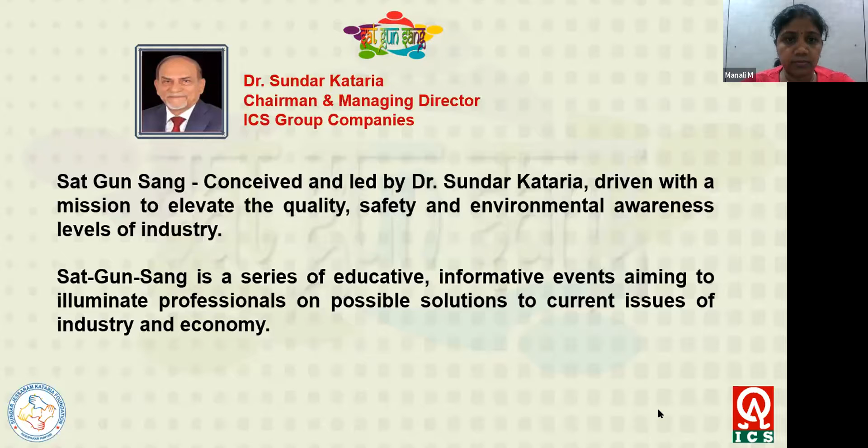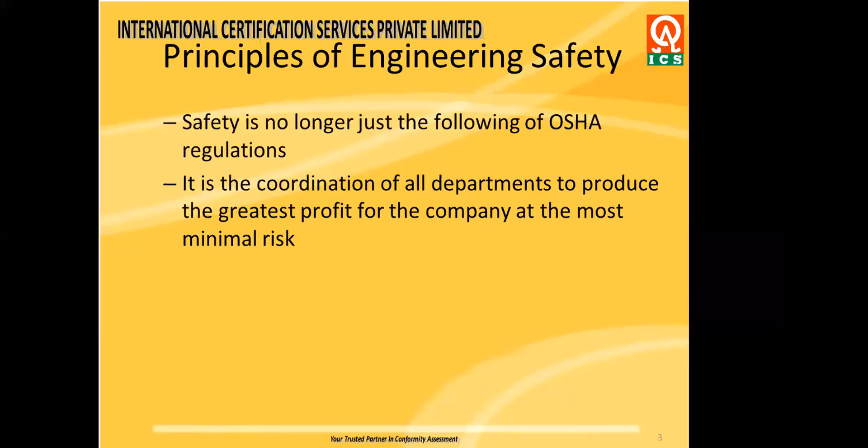Who is Panjit? Panjit is requesting, so I'm declining again. Please do not write.

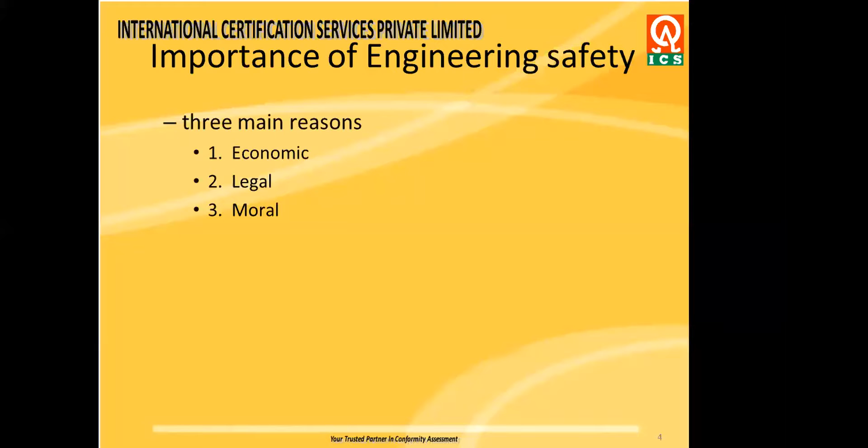There are three major reasons for having engineering safety. The first and foremost is economic—every individual, every company, every country, every organization is working for their economic benefit, and engineering is helping everyone with this. Meeting the legal requirement is again a very important factor for engineering safety. And engineering safety also gives morale and motivation to our people. We shall be covering the major industrial accidents through engineering: machinery, vehicle movements, slips and trips, electricity, manual handling, and uncertainties encountered in design process.

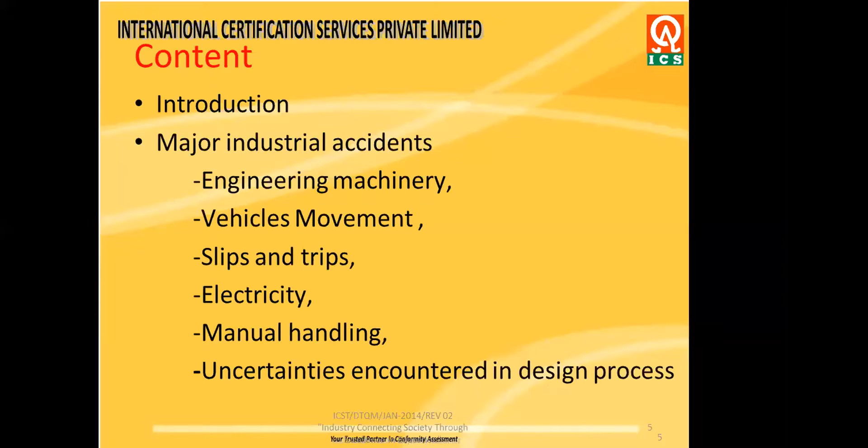So before we start, I'll take two and a half minutes of time to just have a look on how this...

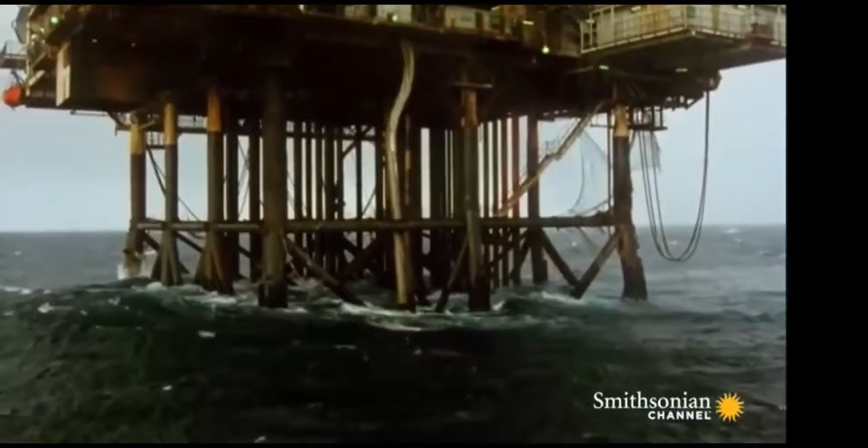Anandji, is there an audio with this? Yeah, you are not able to see, sir? No, we are not able to hear your audio. You will have to reshare it and put the audio, tick mark on the audio.

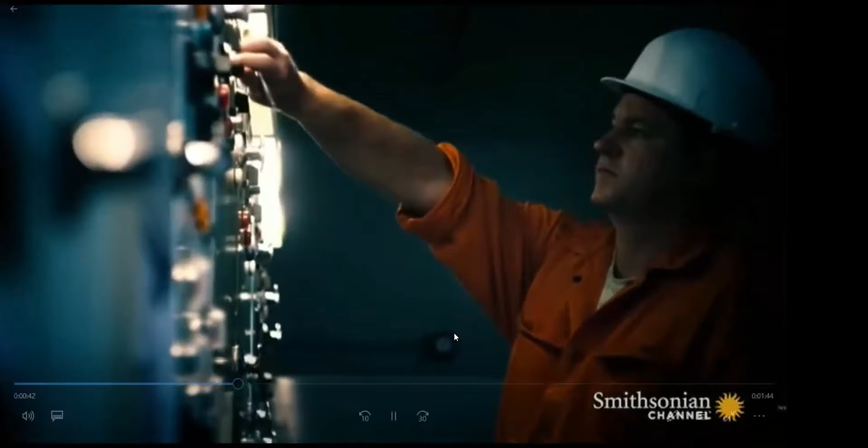So when you do the share screen option, there is a button which says share audio. Just tick mark that. Okay.

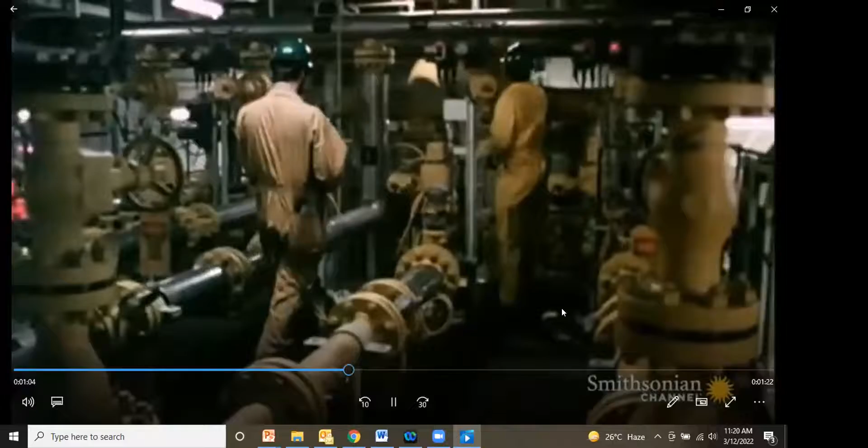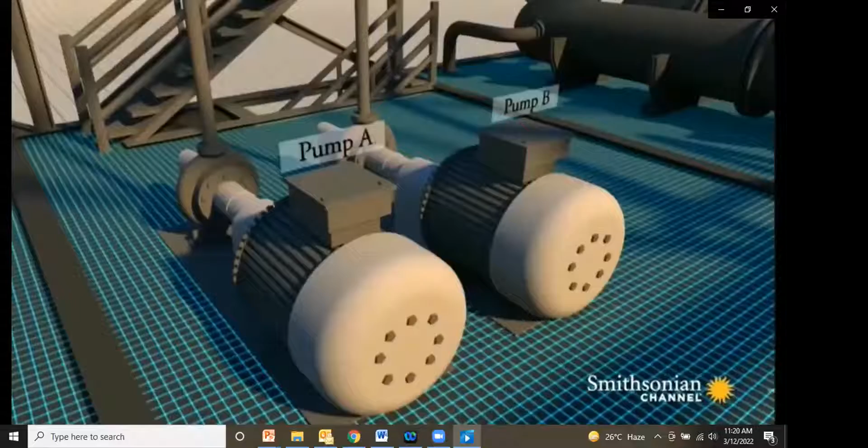Shutting down everything. To avoid a full shutdown, a decision is made to halt maintenance on Pump A and bring it back online. But what nobody knows is that Pump A has a fatal flaw. During maintenance, its safety valve has been removed, meaning that there is nothing to stop thousands of cubic feet of gas escaping into the atmosphere. The faulty pump is switched back on.

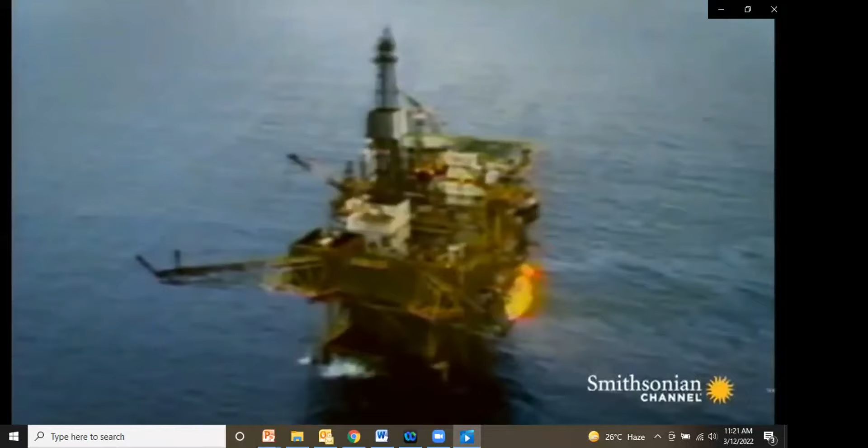Then, at 9:55 p.m., disaster. A spark suddenly ignites the escaping gas, and an explosion rips through the rig. Confronted by 700-degree flames, most of the 226-strong crew are now either dead or severely injured.

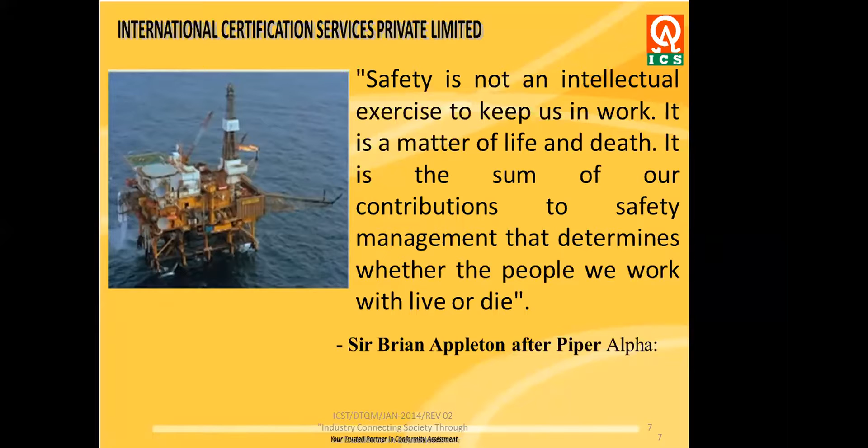So this was an incident which happened at Piper Alpha. Safety is not an intellectual exercise to keep us in work. This was said by Sir Brian Appleton after his investigation. It is a matter of life and death. It is in the sum of our contribution to safety management that determines whether the people we work with live or die.

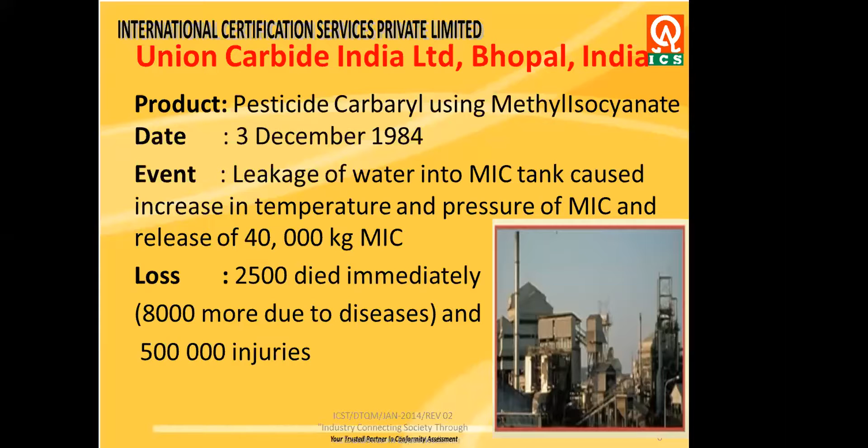You are all aware about the Union Carbide India Limited Bhopal case that happened on 3rd December 1984. The product handled was the pesticide carbaryl using methyl isocyanate. The event that happened on that day was leakage of water into the MIC tank, causing increase in temperature and pressure of MIC and release of 40,000 kg of MIC. It killed 2,500 people immediately, and more than 8,000 people died after some time from that exposure, and more than 5 lakh people have injuries till date. Why did this happen?

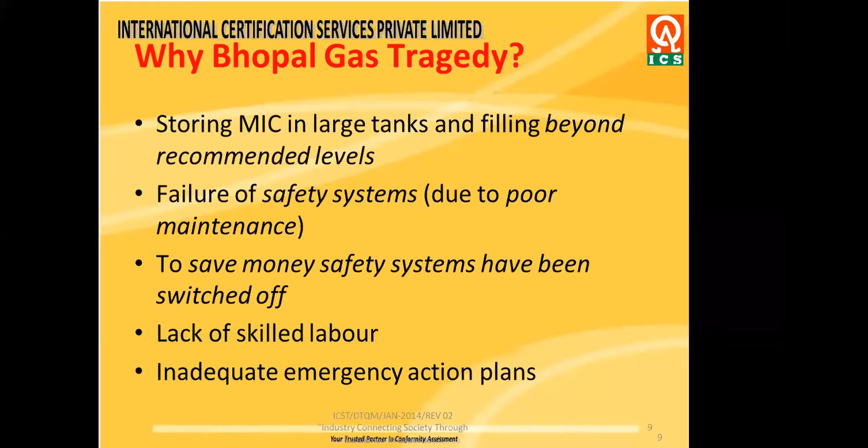It happened because the design was not followed - storing MIC in a large tank and filling beyond recommended levels, not following safety standards given to the organizations, and failure of the safety system due to poor maintenance. Maintenance is again a very important aspect of engineering safety. To save money, safety systems have been switched off. I won't say much on this - this is generally happening. There was also a lack of skilled labor and inadequate emergency action plans.

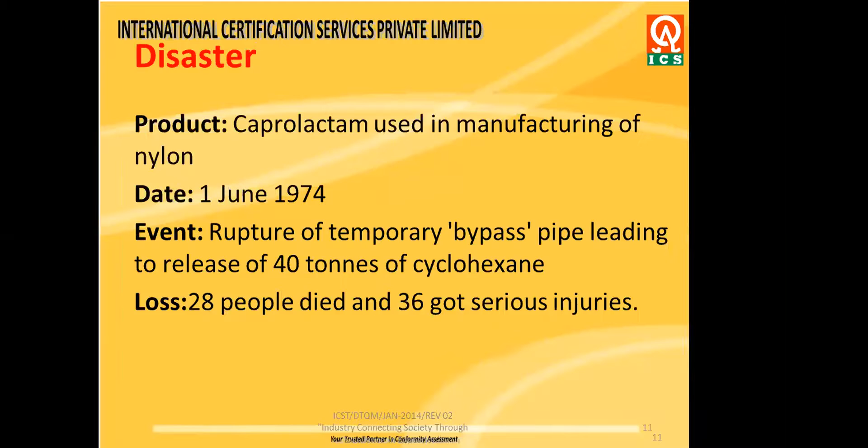There is another incident that happened at a chemical plant in Flixborough, England. The product handled there was caprolactam, used in manufacturing nylon. This happened in June 1974, and the event was the rupture of a temporary bypass pipe, leading to the release of 40 tons of cyclohexane. 28 people died and 36 got seriously injured. The investigation found it was a poor design of the high pressure pipe system by inexperienced engineers. So here the focus is that design is also very important in engineering safety.

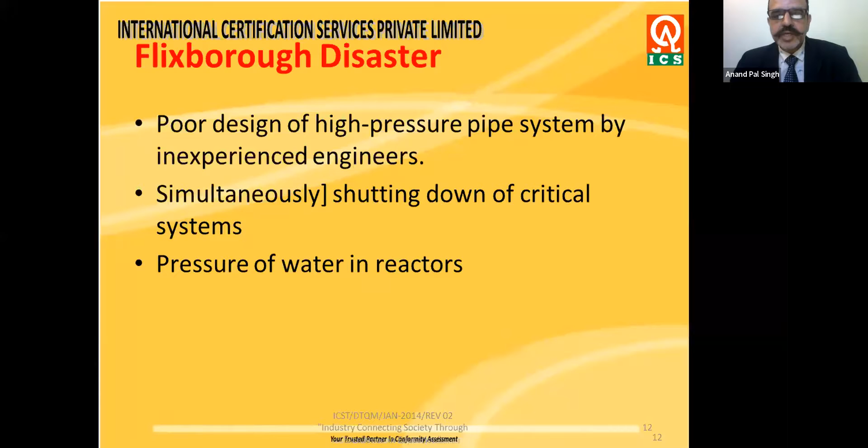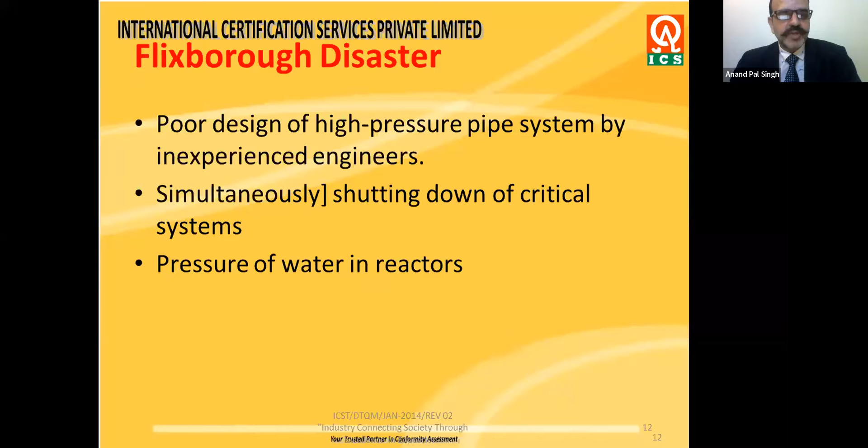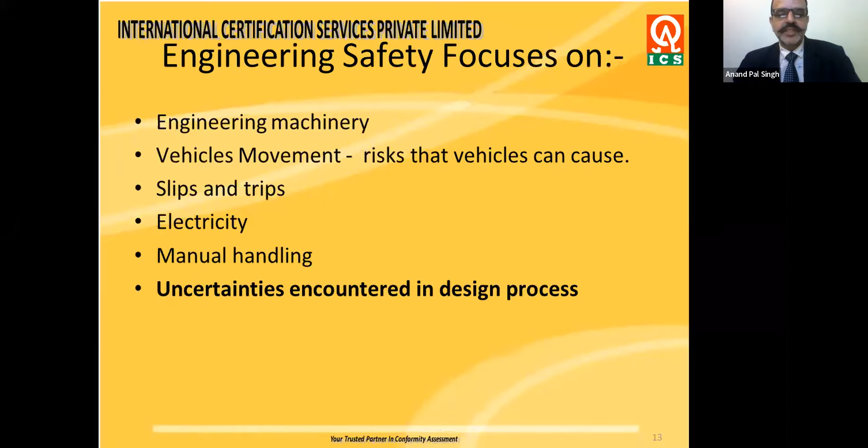Simultaneously, there was shutting down of critical systems, not following instructions, not following guidelines, and incorrect pressure of water in reactors - the norms of pressure, the norms of the machine were not followed. Engineering safety focuses specifically on engineering machinery, vehicle movements inside the plant, slips and trips, electricity, manual handling, uncertainties encountered in the design process, and regulatory and statutory requirements.

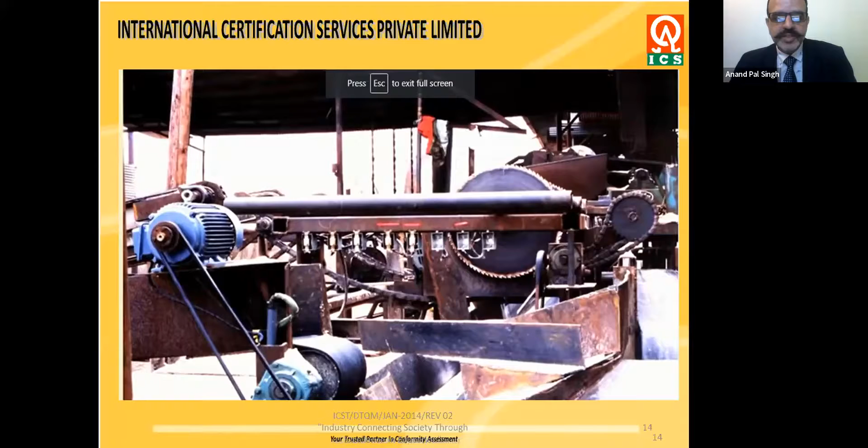You can see this in the steel industry - it's a very common scene in steel plants where the atmosphere is hot and humid. Hazards are sourced by design or technology because there are certain things we cannot relieve. We must have some mitigation plan for such situations.

You must have seen this in construction sites also. In construction, industries have been practicing this type of work - working at height, using safety harnesses and various other aspects - but even then accidents still happen.

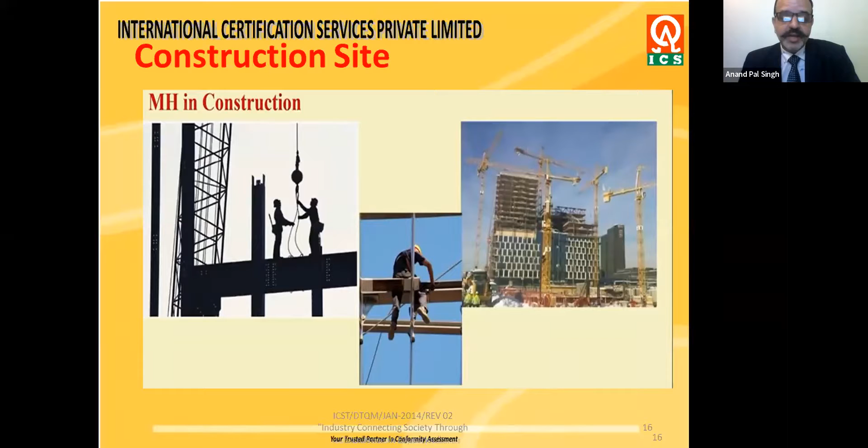There are many thousands of accidents and cases of ill health every year in engineering workshops. More than half of all such accidents reported to HSE involve lifting and moving goods, or slips, trips and falls. Between 10 to 15% of accidents involve the use of machinery, and HSE has produced guidance on how to prevent or manage many of these risks.

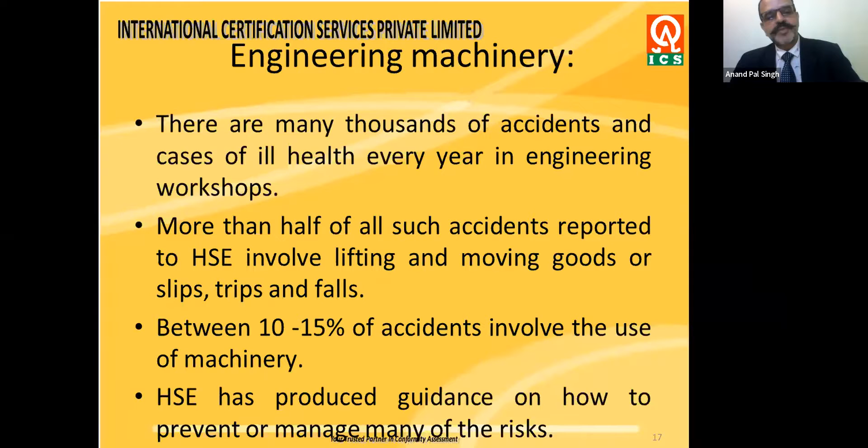Not only the HSE, the Factory Act also gives every detail. I'll be sharing these details in my presentation and coming slides. The objective of this presentation and meeting is to improve safety and awareness in the industry, and to see how we can avoid accidents, prevent them, reduce them, and achieve 100% accident-free working.

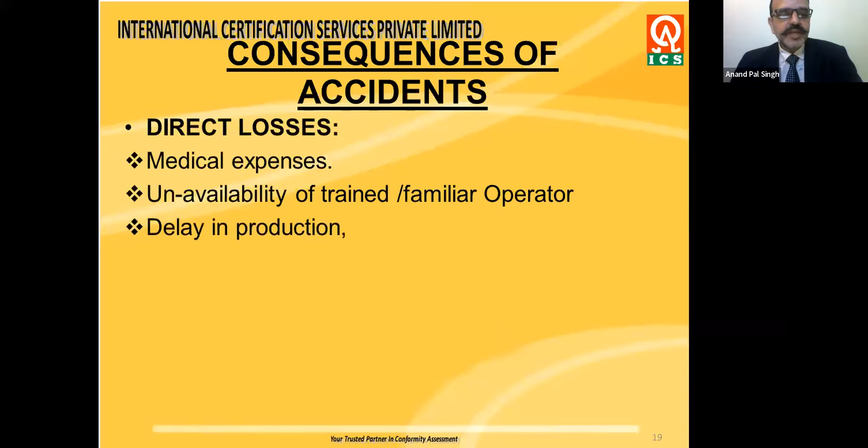This saves productivity, and there are consequences of accidents - direct losses like medical expenses, unavailability of trained and familiar operators, delay in production, loss of order, loss of revenue, and physical disability and death.

There are indirect losses also. There is no peace of mind in the family. When a person is working in an organization where safety is not there at all, the family always thinks whether he will be coming back or not. There is frustration in life, future plans get upset, and there's loss to the family if death or disablement occurs.

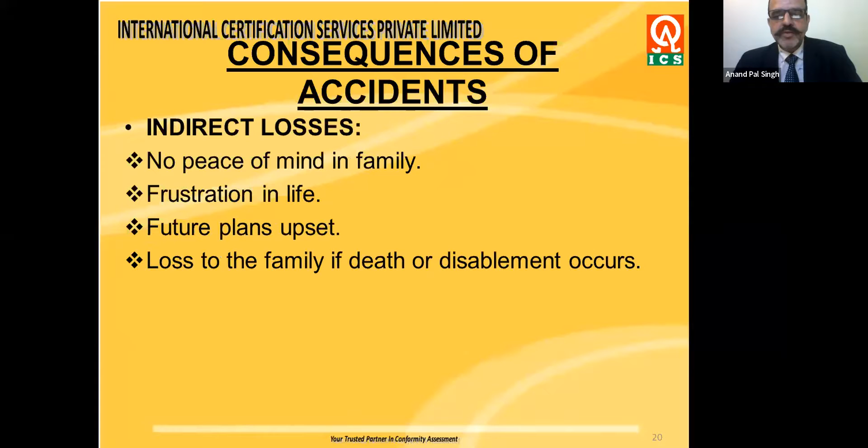Accidents happen due to unsafe acts, not following safety norms applicable to them. You have seen in the video clip and pictorials I showed you that certain safety norms are established which are not followed. The standing orders of the company, of the government of India, of the state government are very well established but not followed.

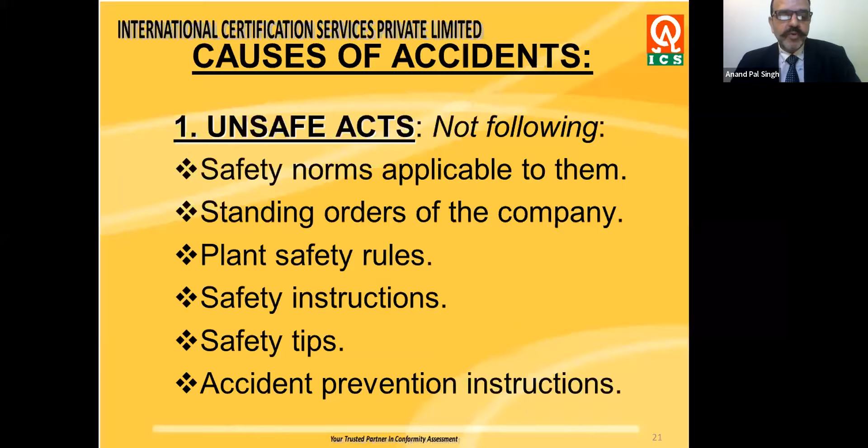Plant safety rules are very well established but not followed. Safety instructions not followed, safety tips not followed or not known. Accident prevention instructions are sometimes not even known and also not followed. Safety guards are not used. There's a 'chalta hai' attitude - people take it very casually.

Safety gadgets and PPEs are being used for something else. We must have seen in this pandemic people having their masks on their chin, not appropriately using safety gadgets. Recommended speeds and feeds of machines are not followed. People don't use the right tools for the right job, using worn out or non-standard tools instead.

There are other miscellaneous causes also, like horseplay at the shop floor, disturbing the concentration of others by throwing items or talking, operating dangerous machines without training, without knowing, without orders. Shortcut methods are again a very usual practice - people try to get things done faster or to avoid certain processes.

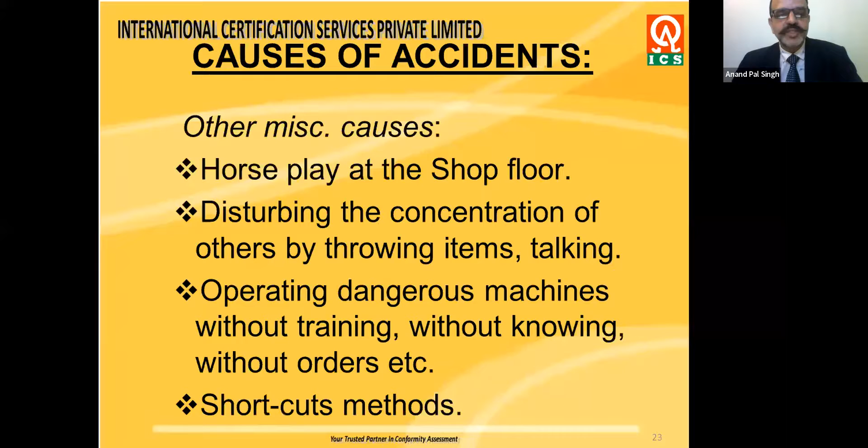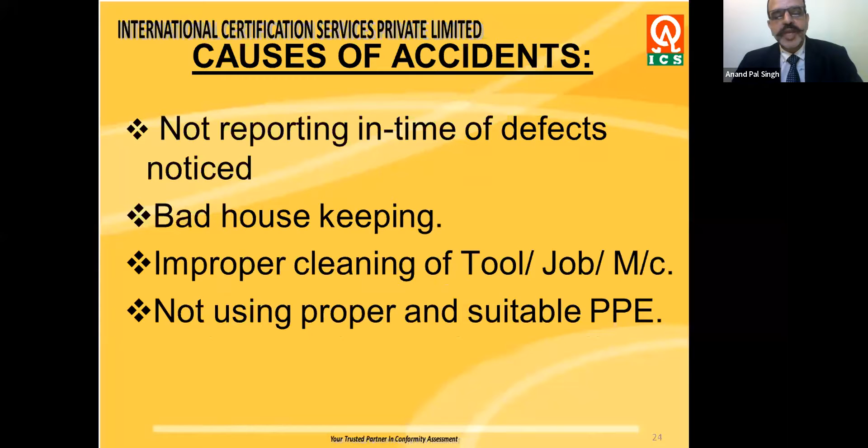Not reporting defects - defects that come into the machine should be reported so that an incident or accident doesn't happen. Bad housekeeping, improper cleaning of tools, jobs and machines, and not using proper and suitable PPEs.

There are personal factors also involved in causes of accidents - faulty attitudes like lack of attention, irresponsibility or recklessness, defective vision. People are not being checked for their vision, lack of sleep, doing too many jobs or too much overtime, or sometimes personal commitments affecting their joining the organization. Risk-taking tendency, alcohol and drug habits, worry and emotions, and certainly physical fitness - to handle a machine, physical fitness is mandatory.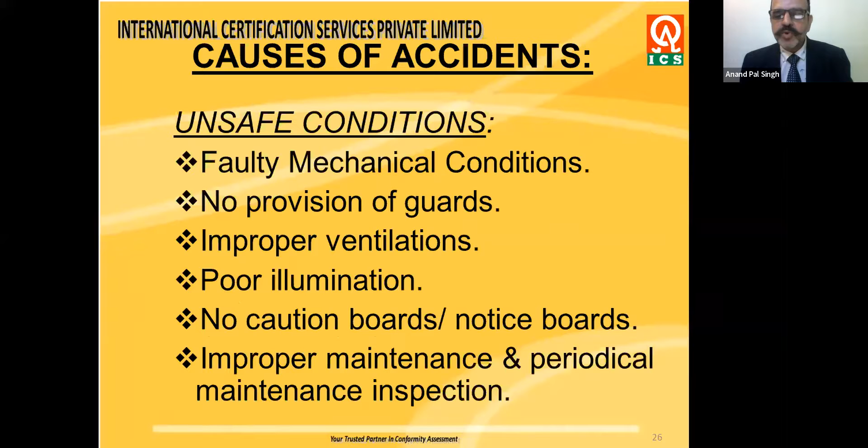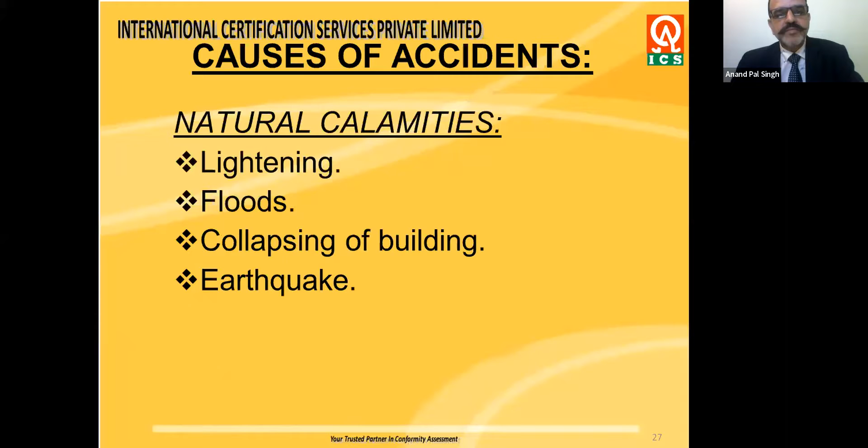There are certain unsafe conditions like faulty machines with no provision of guards, no proper ventilation, very poor illumination, no caution boards or notice boards, improper maintenance, and periodical maintenance inspection not done. Certainly natural calamities also cause accidents - lightning, floods, collapsing of buildings, earthquakes, and any other natural calamities that happen, which is again a big concern.

For this, all of us - managers, supervisors, operators - are responsible for ensuring that hazards are identified. Once hazards are known, risks are assessed in their areas under their control. Risk assessments are recorded and retained for any significant hazards. Staff must be aware and understand the relevant risks in their processes.

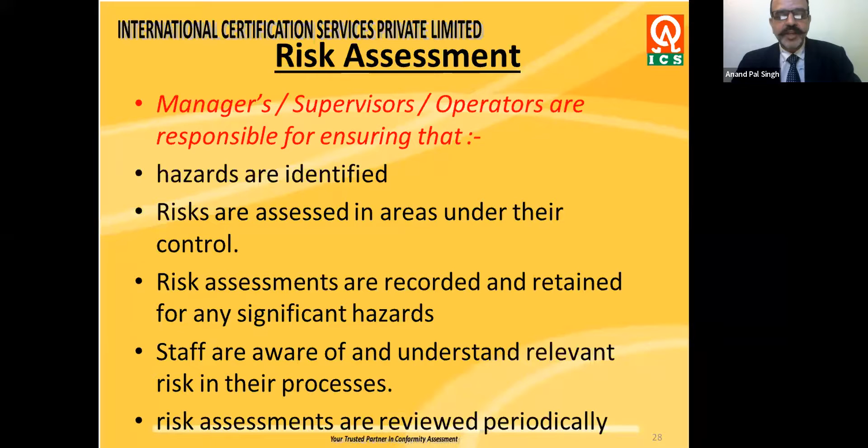It is not only to identify the risk and keep it in the register - it has to be known to every person involved in that particular process. And the risk assessment that is done is not done just once; it is to be reviewed periodically.

There is a control banding technique used to guide and assess the management of workplaces. There is a hierarchy of controls given, but generally it has been seen that safety officers go only with administrative controls and PPEs - they have adequate SOPs and various emergency preparedness plans, and then PPEs are provided. But it has to start from elimination, then substitution, then engineering controls, and then we come to administrative controls.

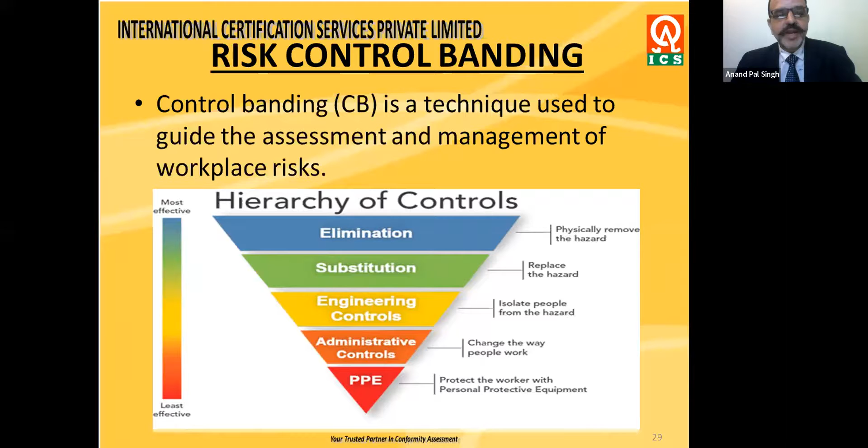We have to learn and understand this hierarchy of control, the control banding for eliminating the hazards. There are common controls for engineering safety which are required to be there at every organization.

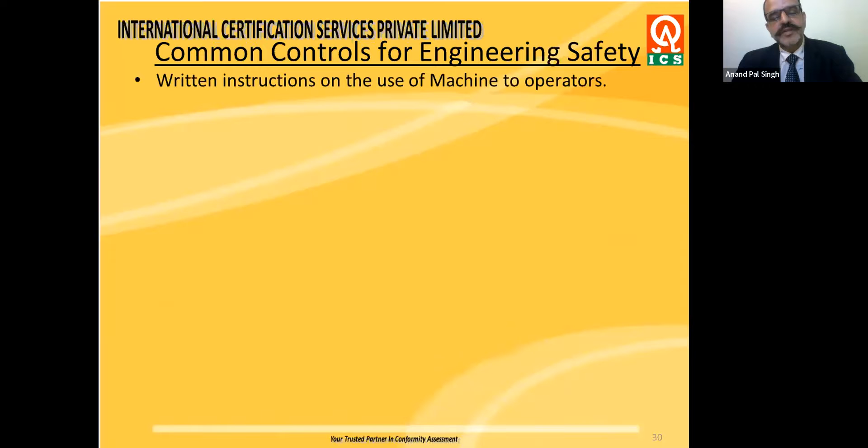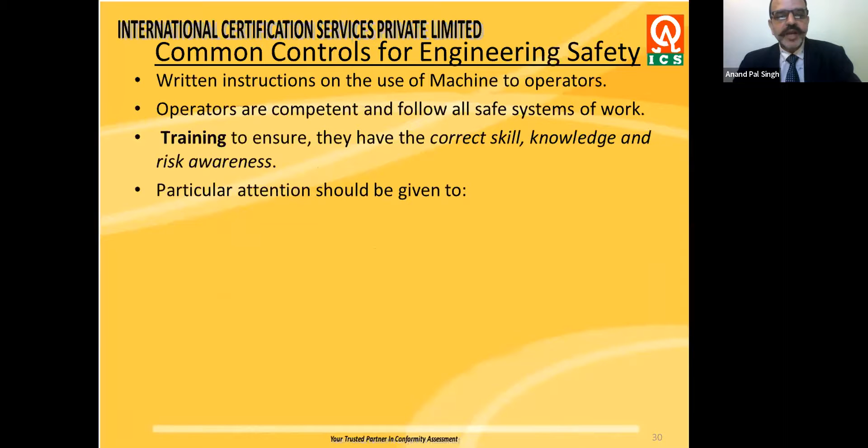That is written instructions on the use of machine to operators. Operators are competent and follow the safe system of work. Training to ensure they have the correct skill, knowledge, and risk awareness. Particular attention should be given to the danger at machine. The operator must know all the dangers in that particular machine so he is taking care of that.

Systems for reporting defect. As I have said earlier, defects in every engineering component can come, but it has to be reported timely to avoid accidents.

Precaution to reduce the risk of entanglement and correct use of guards and other safety devices. Daily test of the trip devices. There are safety provisions given in the machines, machineries, equipment, but those have to be tested every day. Proper cleaning, maintenance, setting and adjustment, loading of workpieces should be done, and unauthorized, unqualified or untrained operators should not be allowed to use the machinery.

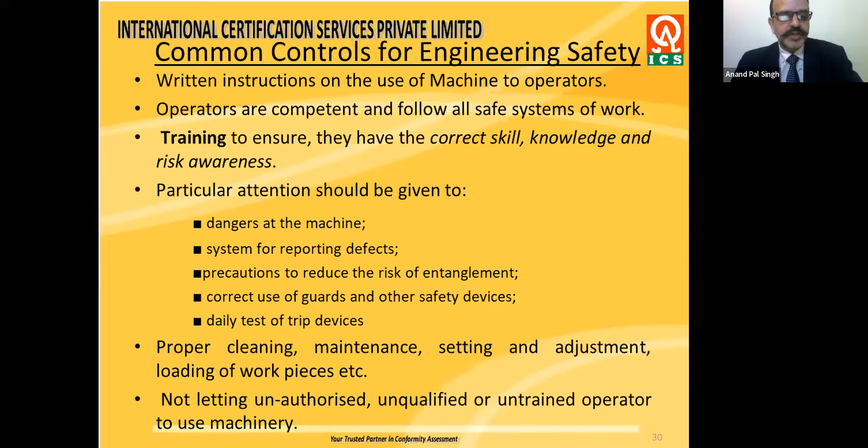There are 10 commandments for safety, which are generally followed or to be followed in the industry where engineering safety is a must.

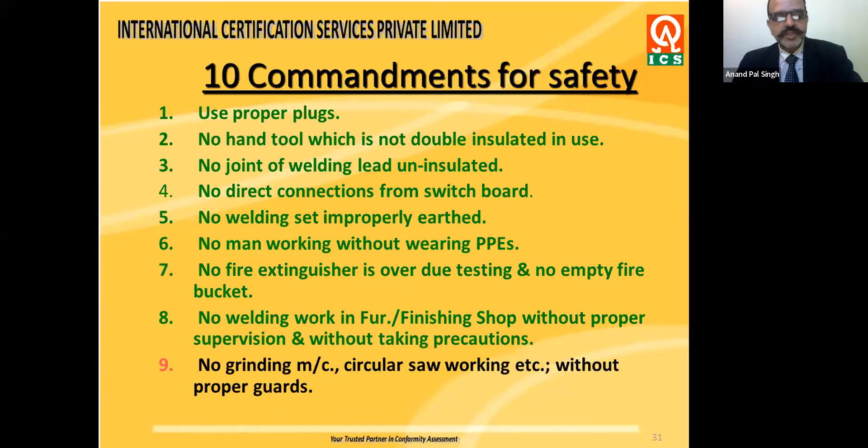Use of proper plugs, no hand tools which are not double insulated in use, no joint of welding lead in uninsulated condition, no direct connections from switchboard, no welding set improperly earthed, no man working without wearing PPEs, no fire extinguisher overdue for testing, no empty fire buckets, no welding work in finishing shop without proper supervision and precautions, no grinding machines or circular saw working without proper guards, and no wire ropes or chains overdue for testing in use.

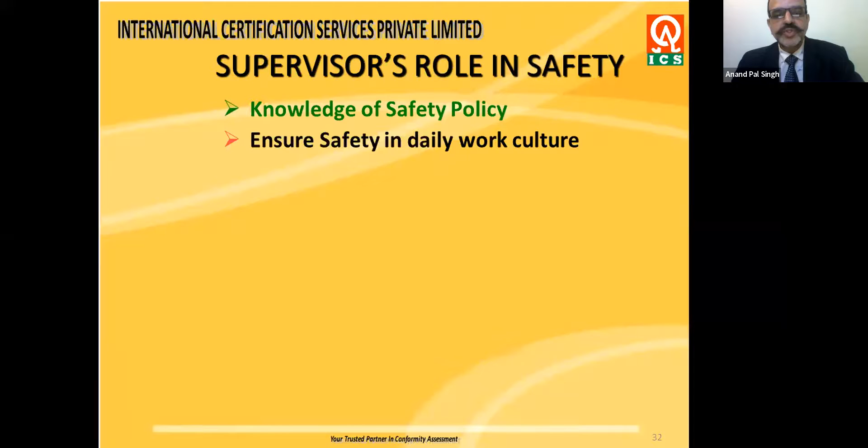There is a supervisor's role in safety. Every supervisor must know the safety policy so he can inculcate the knowledge to his subordinates, and ensure safety in daily work culture. He has to ensure safety around him, that waste is disposed of in time, housekeeping is kept well, and that injuries, whether small or big, are reported every time.

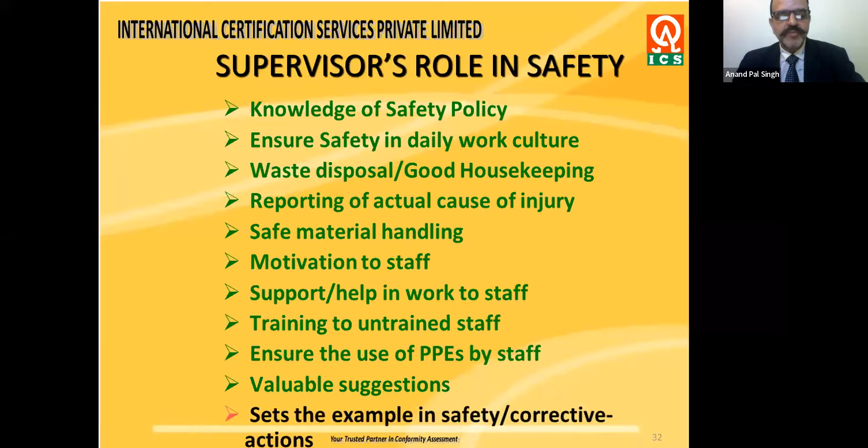Safe material handling, motivation to staff, support and help in work to staff, training to untrained staff - this is the supervisor's responsibility. He has to ensure every person uses PPEs during work, and give valuable suggestions point to point at every respective time. He has to set the example, because once he knows all these things, only then will he be able to set an example and take corrective actions.

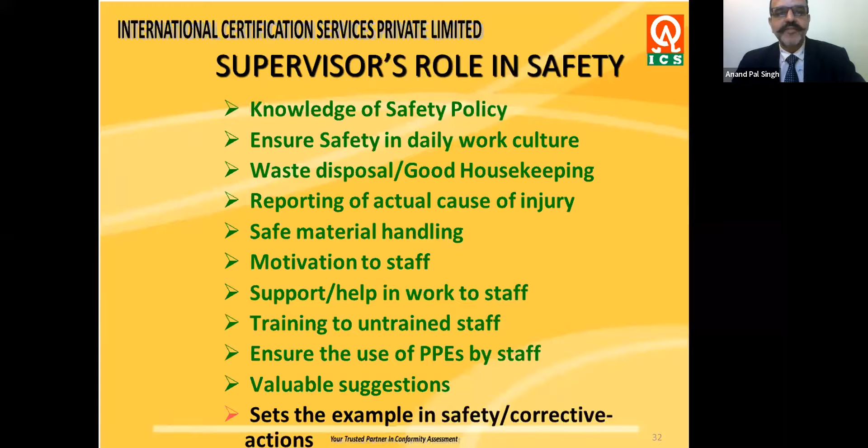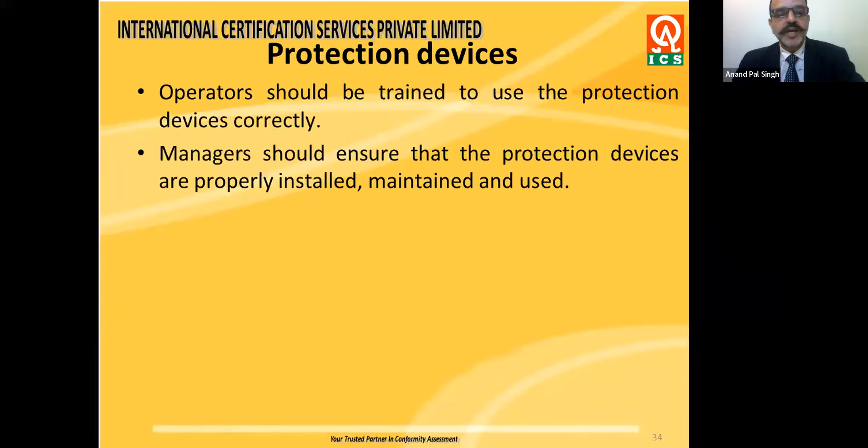Operators should be trained to use protection devices correctly. Managers should ensure protection devices are properly installed, maintained and used. All protection devices should be suitable for the purpose for which they are provided and be of good construction, sound material, and adequate strength to withstand the stress of expected service conditions. Where necessary, components such as interlocking switches should be provided with additional mechanical protections.

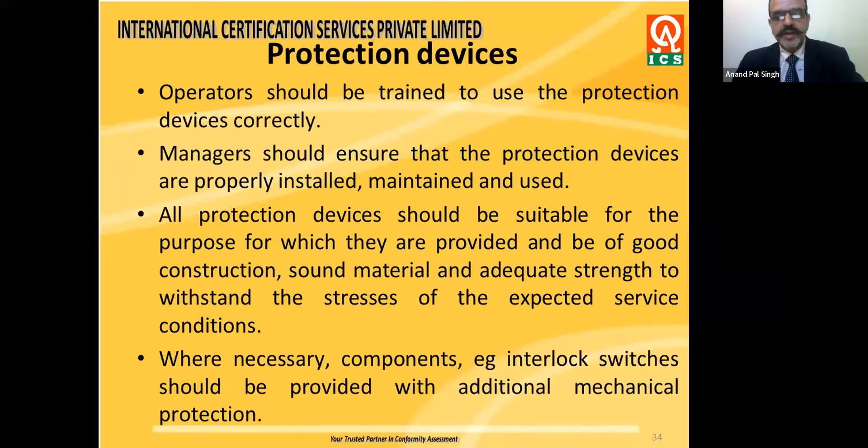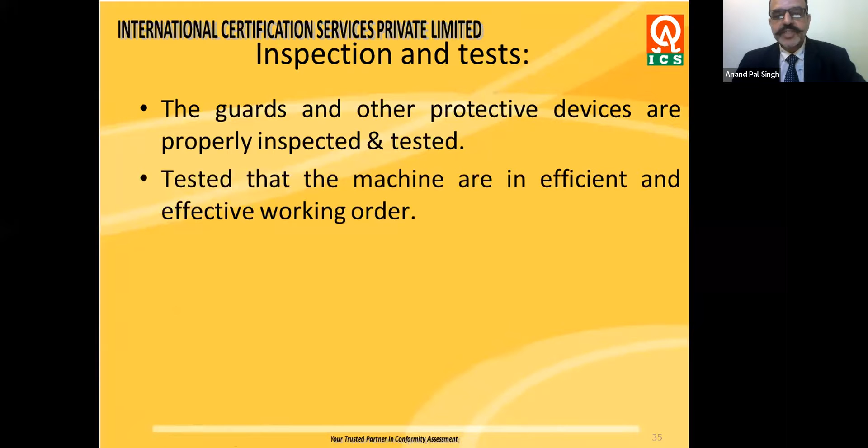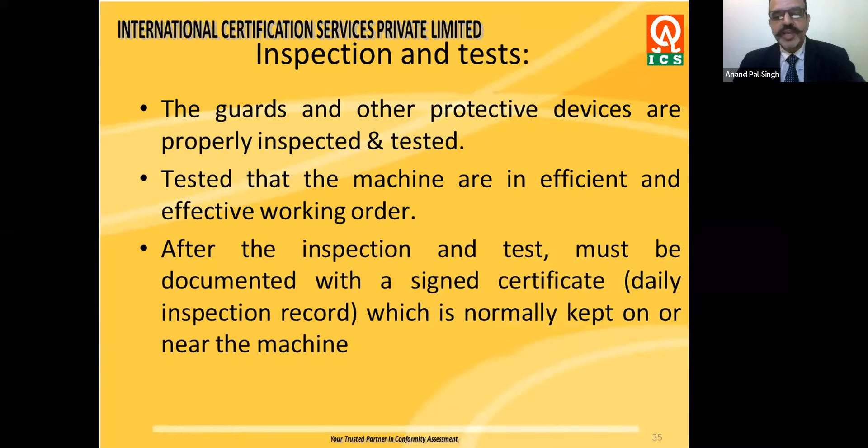Wherever guards and protective devices are used, they must be properly inspected and tested so the machines are in efficient and effective working order. After inspection and test, it must be documented with a signed certificate - a daily inspection or daily check record - which is normally kept on or near the machine.

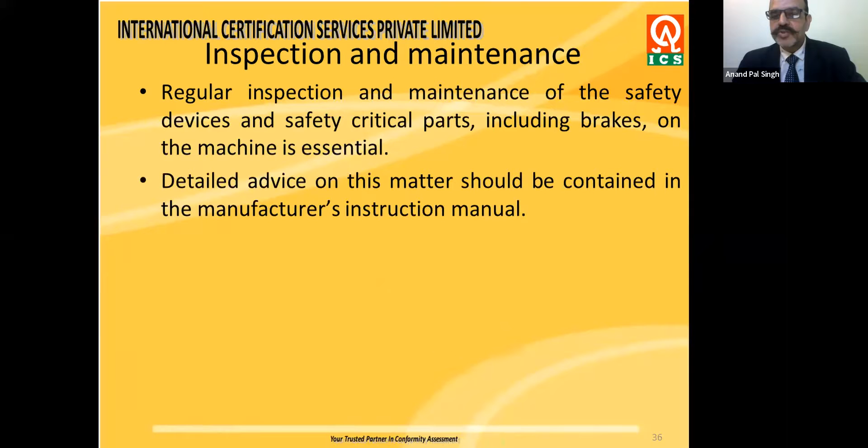Regular inspection and maintenance play a very critical role in engineering safety, including various important aspects like brakes and other safety devices. Detailed advice on the matter should be contained in the manufacturer's instruction manual. Cleaning, including cleaning of the rollers, should be carried out with the machines switched off and isolated.

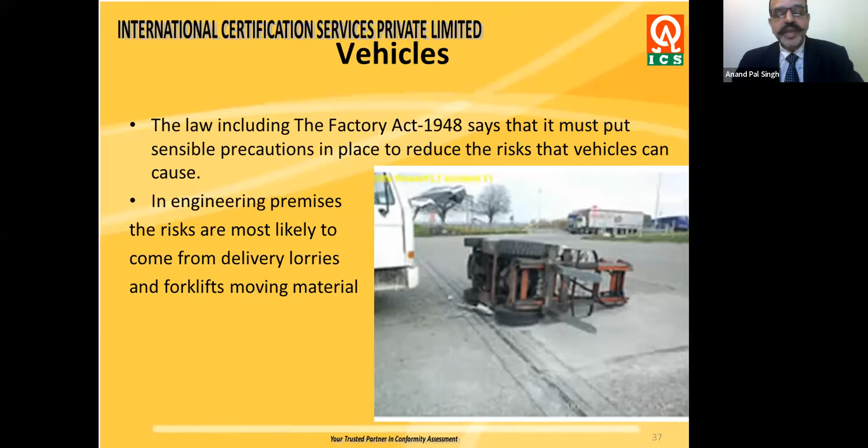Vehicles play a big role in engineering safety, and the Factory Act 1948 also says that sensible precautions must be put in place to reduce the risk that vehicles can cause. In engineering premises, the risks are most likely to come from delivery lorries coming to the organization and forklifts used for moving material around the workplace.

Delivery vehicles can hit pedestrians and forklifts, so it is important that drivers understand and follow the site rules to control these risks. You also need to think about preventing falls from the vehicle during loading and unloading operations.

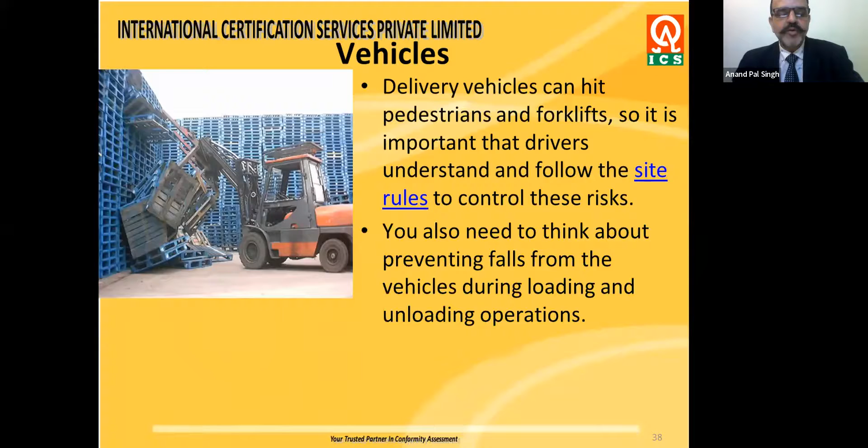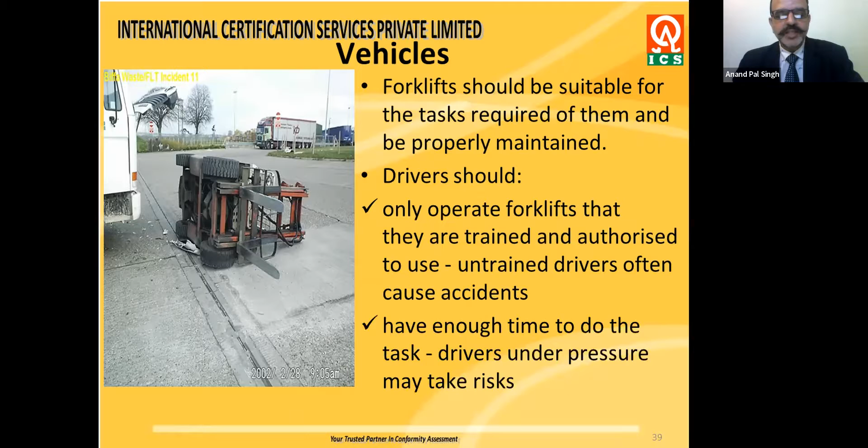Forklifts should be suitable for the task required of them and be properly maintained. Drivers should only operate forklifts that they are trained and authorized to use. Untrained drivers often cause accidents. It has been seen in industry that whosoever wants to use the forklift inside the factory just uses it, so operators must have enough time to do the task and should not be in a hurry or under pressure to take any risk.

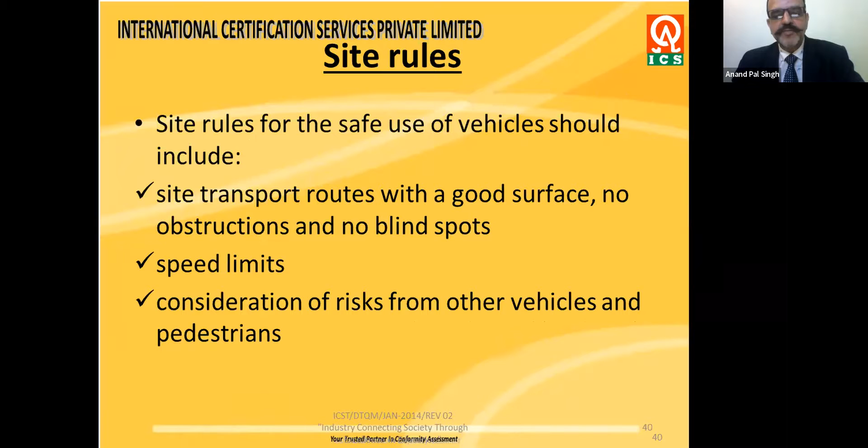There should be site specific rules for vehicles and site transport routes with a good surface, no obstructions, no blind spots. Speed limits should be defined, and consideration of risk from other vehicles and pedestrians should also be defined. When the company is big with a lot of areas where people are walking and vehicles also going, pedestrians must be well taken care of.

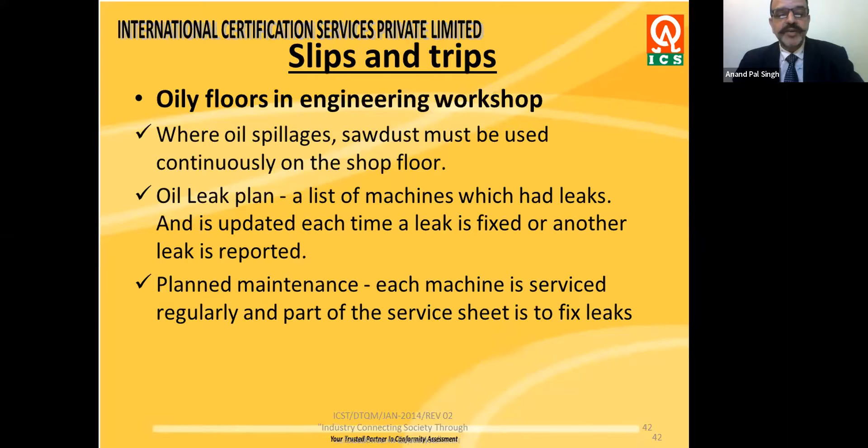Slip and trips is again a very common cause of accidents in general engineering workshops, due to oily floors. So we must use sawdust immediately where there is a leakage. You must have an oil leak plan and planned maintenance for each machine where leaks occur, and that has to be fixed immediately.

Material handling and manual handling is again an area we have to see during engineering safety, because when loading, moving or unloading material we get a lot of issues like musculoskeletal disorders, sprains, aches, or injury to tendon, joint, or bones. When we are lifting material which has fumes or is chemical based, how that fume can spread and how to hold and lift it also needs to be seen.

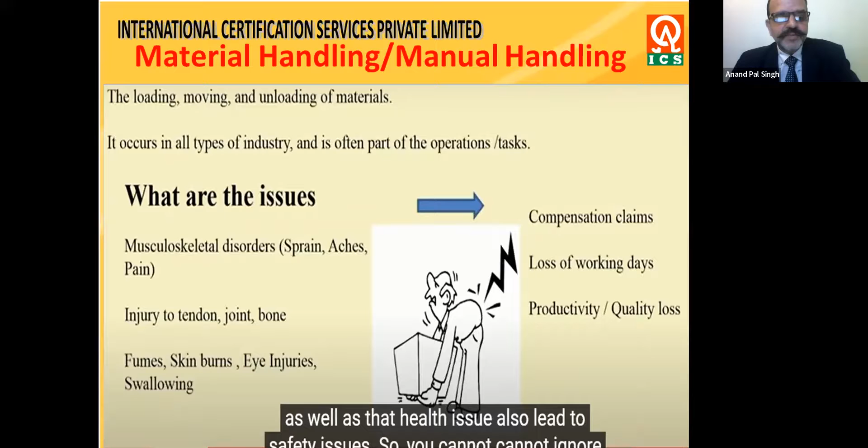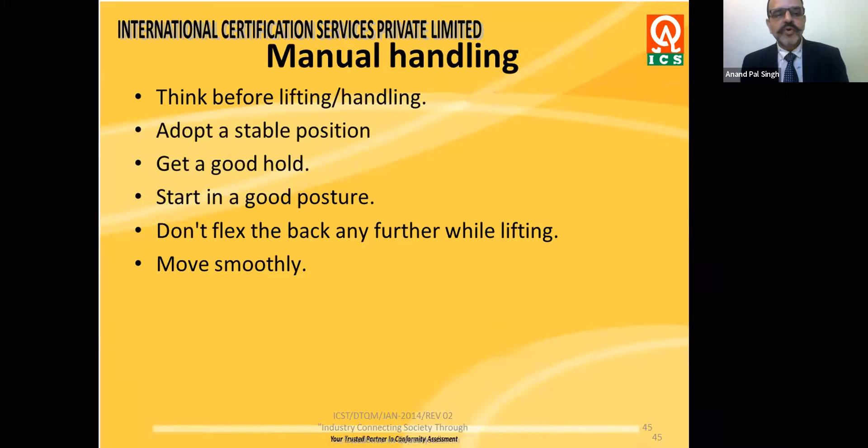For manual handling, we must think before lifting and handling what the material is and how it is to be done, adopt a stable position, get a good hold, and start in good posture. Don't flex the back further while lifting, and move smoothly.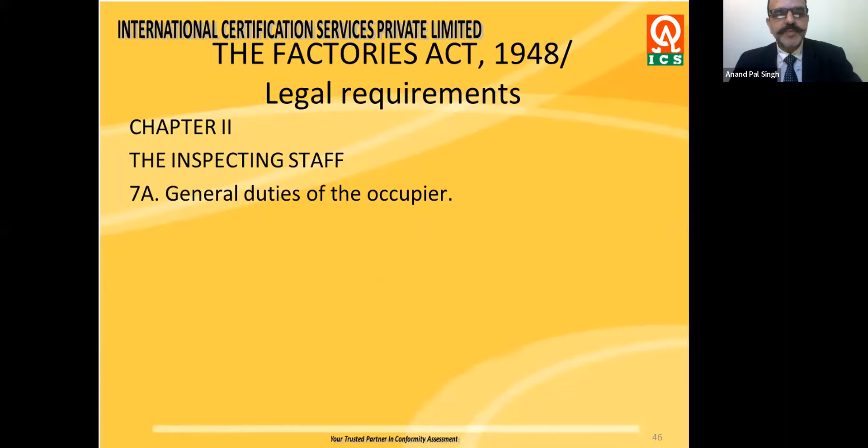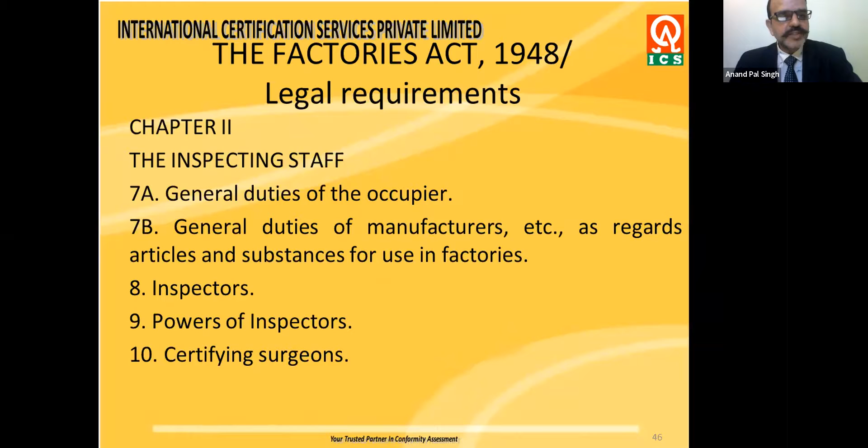As I told, the Factory Act gives enough information about the inspecting staff, the general duties of the occupier, safety for manufacturers, for inspectors, the power of inspectors, and certifying surgeons. Chapter 3 speaks about health, and in that it very clearly and elaborately explains cleanliness, disposal of waste and effluents, ventilation, dust, and fumes. So all aspects have been covered here.

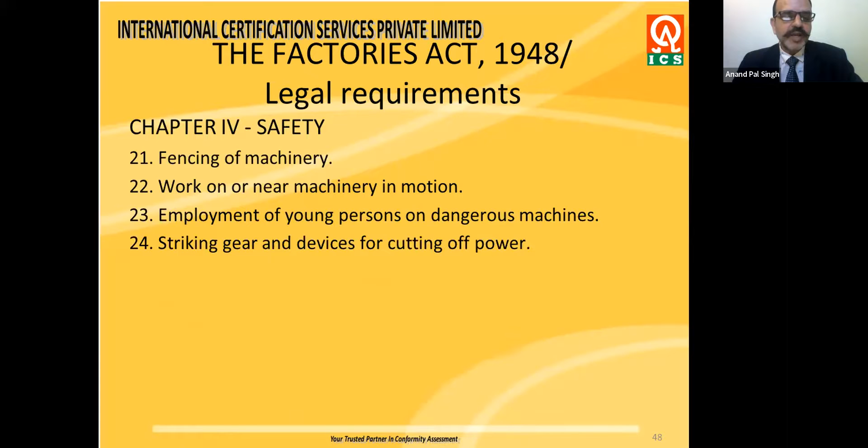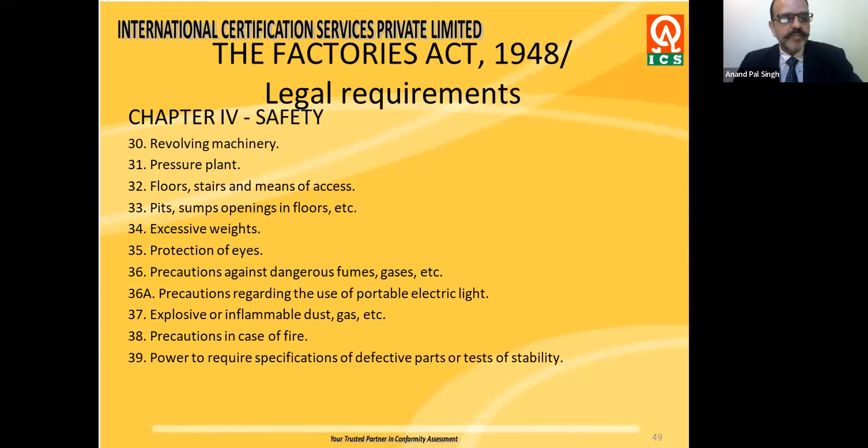It is just an indication I have given. This Factory Act is available and we must go through it. Every individual must know these safety aspects given in the Factory Act, including safety related to revolving machinery, pressure plants, pits, excessive weight, protection of eyes, precaution in case of fire, and power to require specification of defective parts. So there are many things, you can say everything is given in this.

Chapter 4A has provisions relating to hazardous processes, their constitution of a site appraisal committee, and compulsory disclosure of information by the occupier - you must have seen the board displayed outside the company. It also covers specific responsibility of the occupier in relation to hazardous processes, and power of the central government to appoint an inquiry committee in case of any investigation required, and emergency standards.

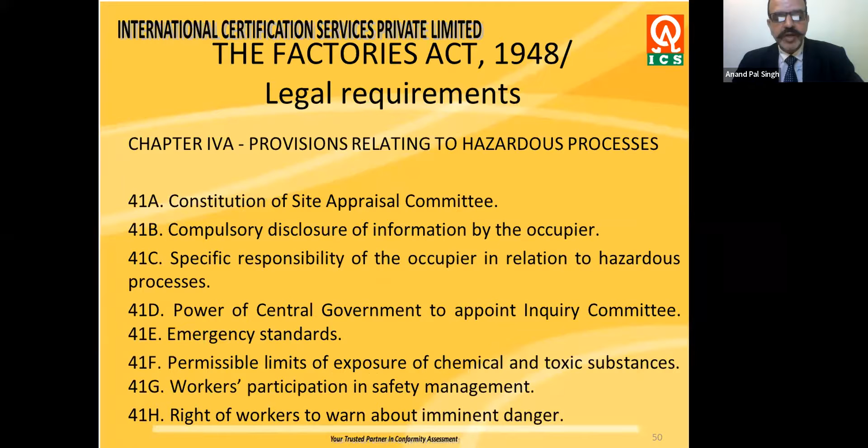It also covers permissible limits of exposure of chemical and toxic substances, workers' participation in safety management, and the right of workers to warn about imminent dangers. Again, there are too many welfare conditions to list.

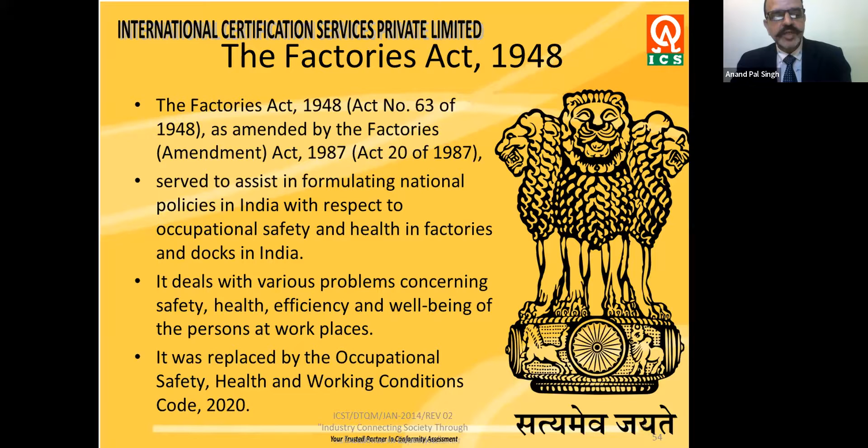We must go through the Factory Act 1948, Act number 63 of 1948, as amended by the Factories Amendment Act 1987, Act 20 of 1987, which serves to assist in formulating national policies in India with respect to occupational safety and health in factories and docks in India. It deals with various problems concerning safety, health, efficiency, and well-being of persons at the workplace. It was replaced by the Occupational Safety, Health and Working Conditions Code 2020 also.

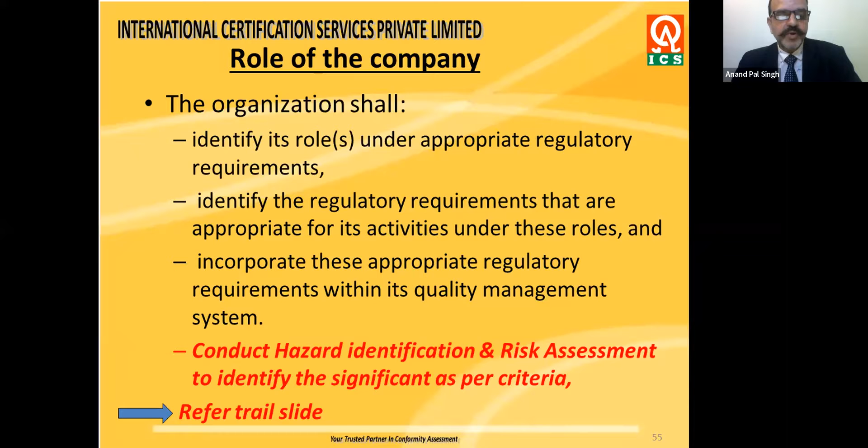The organization's responsibility is to follow the regulatory requirements, which are very well defined and known to them. They must identify which regulatory requirements are applicable to them, incorporate these appropriate regulatory requirements within their management system, and conduct hazard identification and risk assessment. This is very important to identify significant risk as per the criteria.

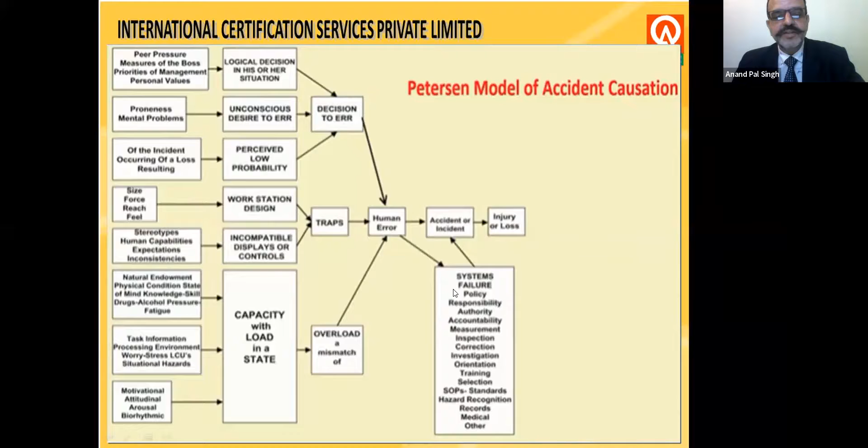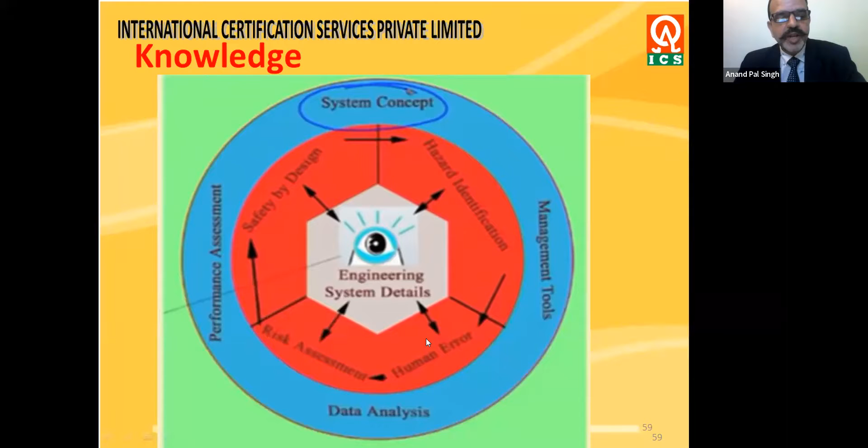Knowledge is again a very important factor here. We have to have a concept to understand what the system is. With that system, we must know what all the management tools are there. With that, we must identify the hazards - how to identify the hazard of machineries, and what is the safety by design in that particular machine, and with that hazard, what all the risks are there through risk assessment, and what could be the human error. This is the eye of the engineering system details.

So this is from my side. The topic was very elaborated, but I tried to compile it in a very short duration. I'll request now Manali to take over. Thank you.

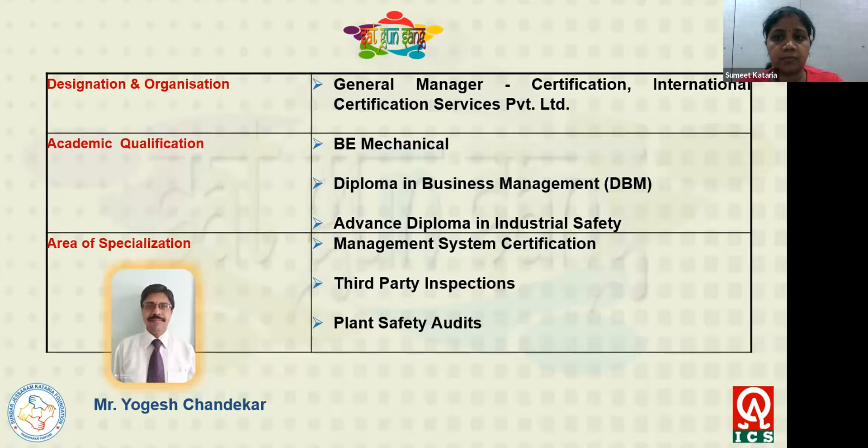Thank you, Manali. Am I audible? Yes sir. Thank you, Anand sir. Thank you for presenting on today's topic - engineering controls related to safety with respect to machinery, vehicle movements, slip trip falls, electricity related, material handling, overall housekeeping and all. So nicely covered. We know each and every topic will have a separate presentation because safety is so vast and so many things are associated with it. But still you have taken us through a fair idea about what exactly the issues in safety are and how to overcome those.

You have also given the solutions or the requirements with the statutory requirements and all that. So first of all, I would like to know, Anand sir, regarding the engineering controls that we have - I think the inbuilt systems, meaning whatever machinery any organization uses, ideally it should have safety inbuilt controls. So to that extent, whether that kind of regulations or requirements are set on the manufacturers who are manufacturing those machines, which will have the hazards - that is the risk mitigation at the manufacturer end for that particular machine. On that aspect, if you could throw some light.